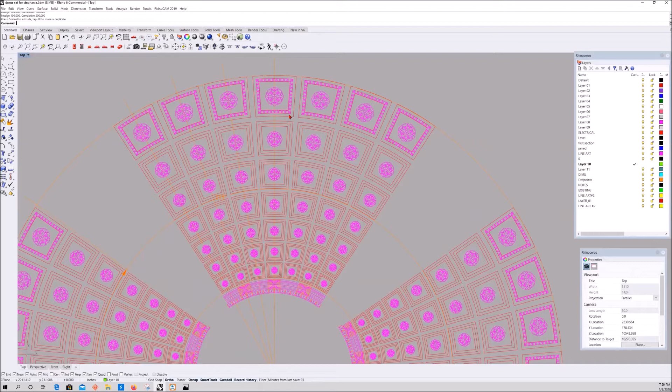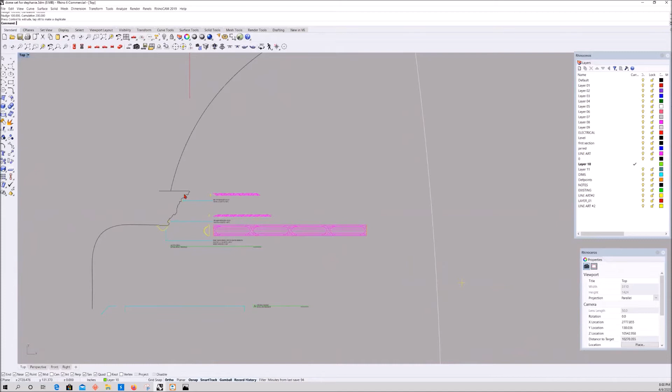Obviously, when the project is started, everything's done in CAD layout in 2D. But a couple things I wanted to show you here is that we have the different size rosettes, and then you can see what we call an egg and dart molding that travels around the perimeter of each one of these frames. So by digitizing the space, we came up with this information: JP Weaver needed the radiuses for this molding that was placed at the bottom of this existing plaster. And then you can see these two other profiles that were placed on this to add decoration to the perimeter.

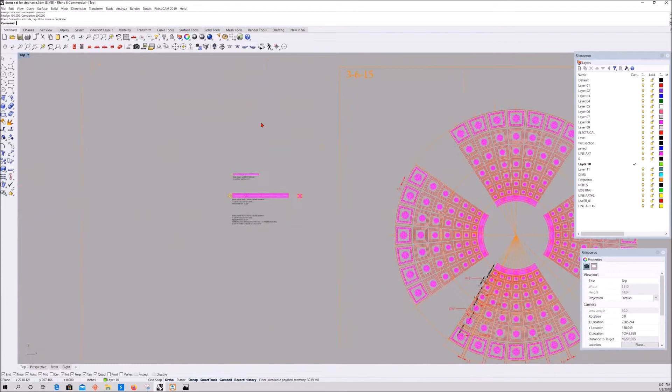So we needed to digitize this whole space. So what we did was the entire stairwell. And so the difference is when everything's laid out flat, you can see, but when we put it into a curve, it starts to look something like this. And this will make more sense when I go into perspective. So we took that CAD geometry and laid it out in the dome shape like this.

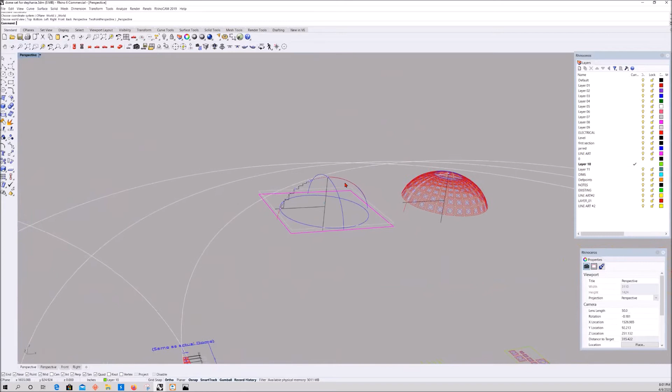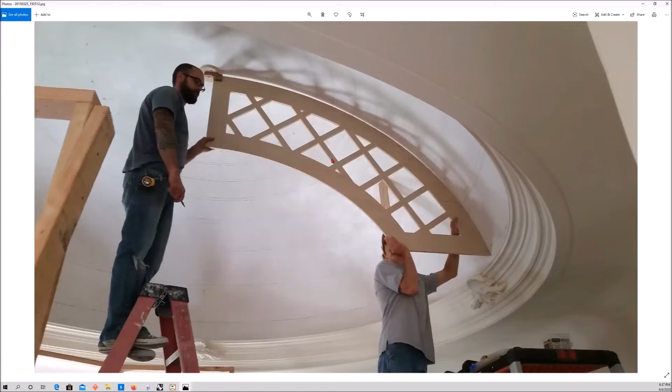The way that we did that is through a couple different processes, but these line segments were generated from the scan data. And then we were able to create some jigs that simplified the installation. Here's Jake and one of the other guys transferring these lines to the dome, and then we used the other jig to create the layout, and then subsequently moving on to this guy here. So once we confirmed that, the other jig was placed on the laser line in 4 locations, rotated, and then those guys were installed.

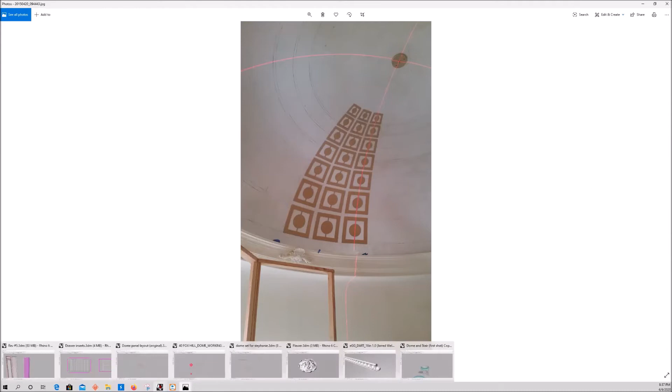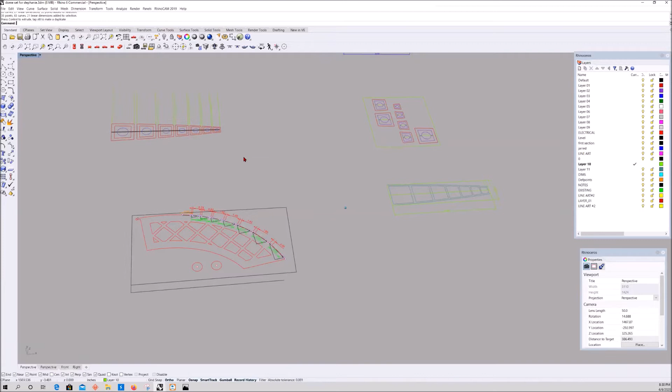But we took a project that had been originally bid at 3.5 to 4 weeks for 2 guys up in the dome and 1 guy down on the floor installing, to just under a week to install the whole finished product.

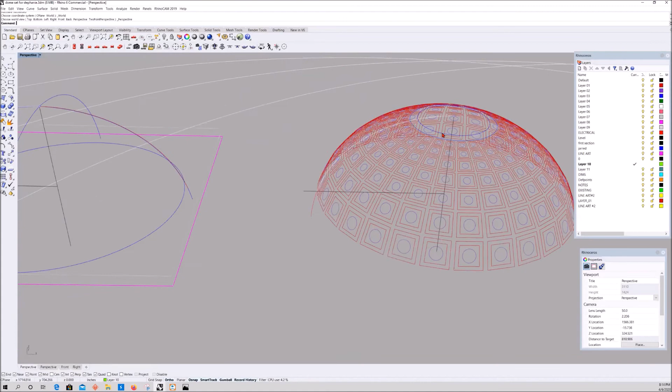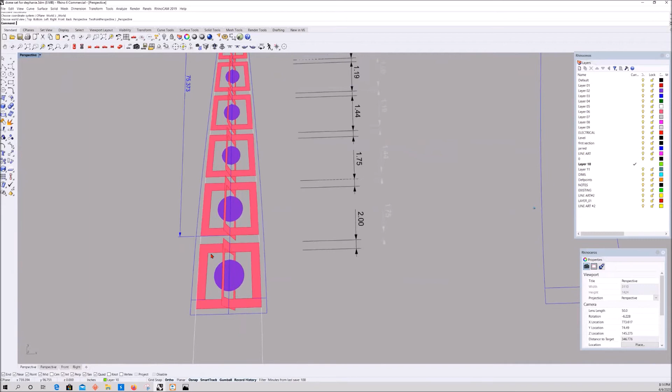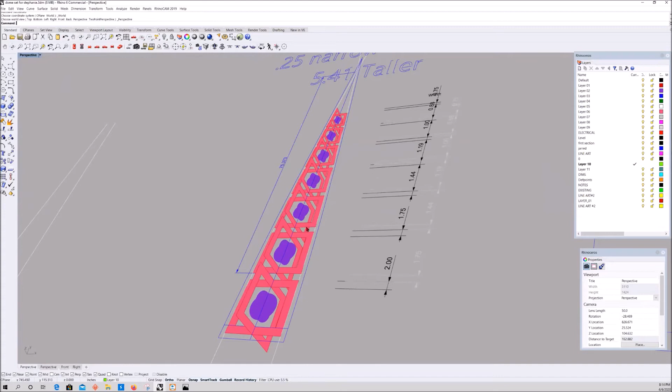You can see inside of the dome here, we have our center section, and these are the layout lines for the sizes of the frames. Those frames were generated from this curvature geometry. And these here are the sizes of the finished frame: 2-inch, 1.75 inch, 1.4, 1 3/16, an inch, and so on. The reason this is really valuable is that we wanted these to scale from small to large, and we didn't have the ability to reuse any of these rosettes or this egg and dart. So what we did is we took the model.

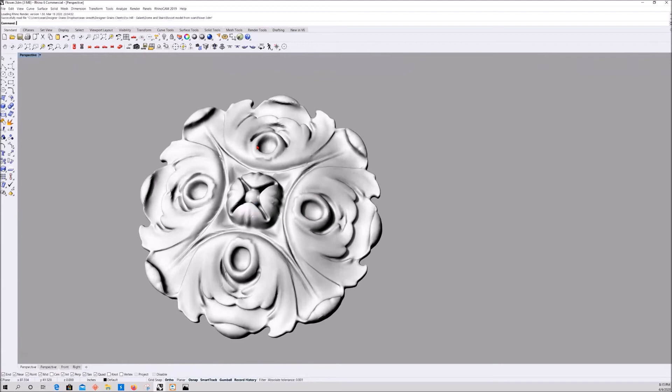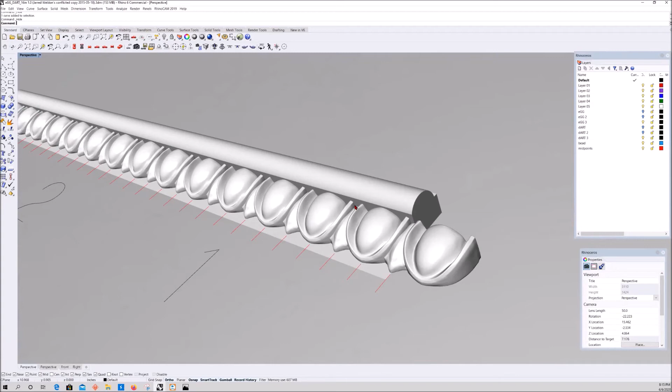This was one of the rosette shapes, and these varied from 1 5/16 inches up to 8 inches. So working with JP Weaver, we were able to scan these elements, and then create new ones that they were able to mold in the appropriate sizes. On all of those frames, I think we started out with 2 or 3 different sizes. So we took one of the profiles, digitized that, and then scaled those to the appropriate size, so that at each frame, the egg and dart and the rosette was its appropriate size and spacing as we traveled up the dome.